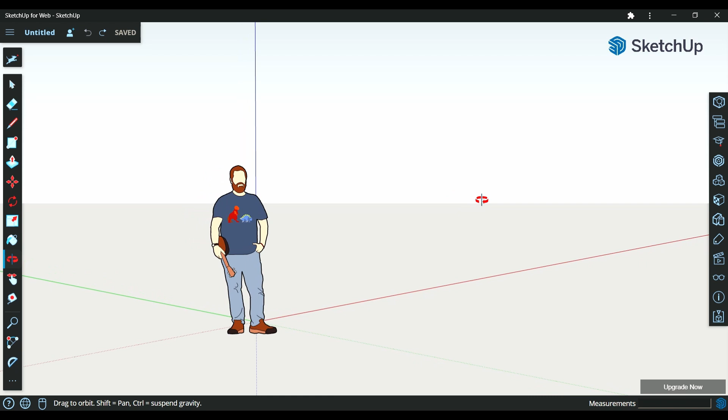This one's going to go over the approach I use to set the sizing and geometry of a bike board. We are here in the glorious expanse of cyberspace because we're not really going to be building anything. Today is just about theory. And yes, there will be a test after the video.

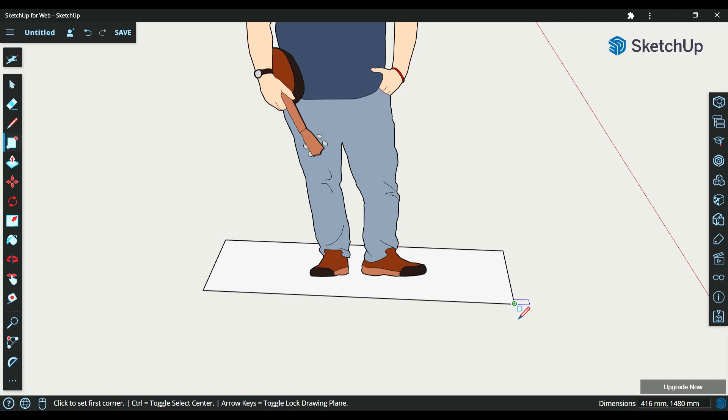So, first things first, we need to accommodate the rider. I'm drawing the size of the deck based on how wide this guy's feet are and what kind of a stance he wants to hold while riding. The next major component is the wheels. As you can see, the size of the wheel determines how short you're going to be able to make the wheelbase before the wheel collides with the deck.

Oh my god, this is just like the Mona Lisa.

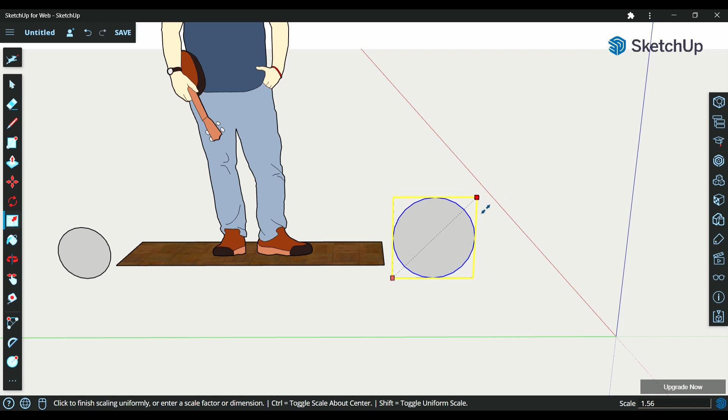So if we keep the ride height and the clearance between the wheel and the deck the same, you can see there's a trade-off between the size of the bumps you're able to handle versus the standing platform and the wheelbase. In comparison, the size of the tire plays a much more important role, which you can see when viewing the vehicle head-on.

This angle I'm drawing right now represents the maximum lean angle the board can hold before the deck hits the ground, with a steeper line meaning a steeper lean angle. And as you can see, if we keep the ride height the same, a smaller tire will permit a smaller amount of lean angle than a wider tire will. In this case, the difference is about 5 degrees.

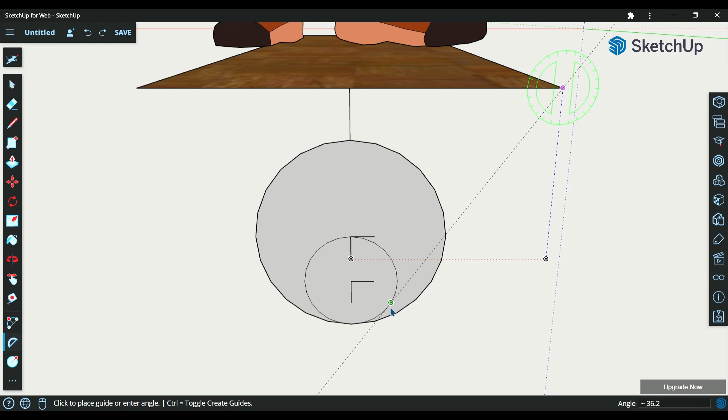The size of the tire also affects how much you're able to steer the board before your ankles give out. Imagine you're trying to make a tight turn at low speed, so your body isn't leaning very much, but the board is. According to your ankles, you're not going to feel the board rotating around the contact patch on the ground, but around the center of the tires.

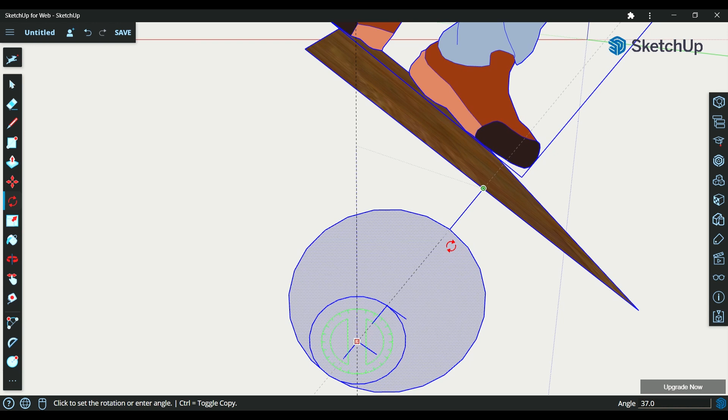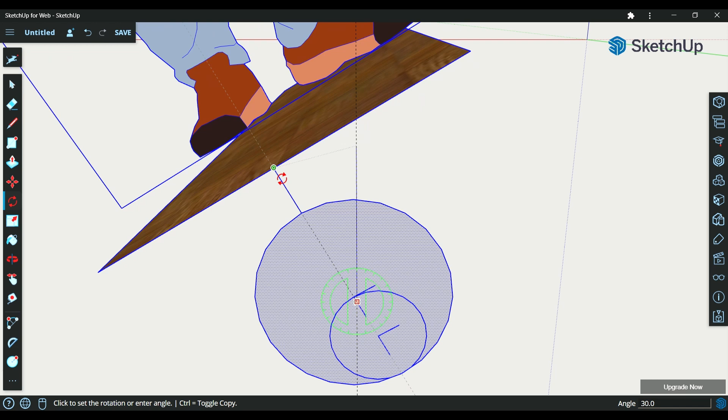If you lean the board over so that either the ball of your foot or your heel goes past this vertical line, which represents your center of mass in this situation, you won't be able to support the board anymore, and it'll just tip all the way over. A larger diameter tire will let you lean over further before your heel or your toes go past the tipping point. In this case, about 5 more degrees.

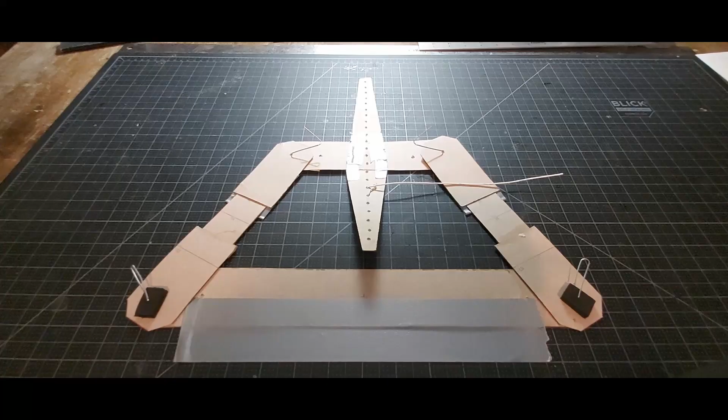So, adjusting the ride height controls the trade-off between tip-over angle and lean angle, but a larger diameter tire lets you get more of both. But enough computer programs, let's do things the civilized way and use cardboard. Now, bike boards will work just fine using a conventional bicycle steerer tube and fork, but it looks kind of dorky and tried and true methods are for suckers anyway, so let's talk about 4-bar linkages.

The steering mechanism has one link running parallel to the axle, which I'm labeling A. It's got 2 following links, which I'm labeling B. And it's got a ground link, which I'm labeling C. In linkage lingo, the ground link is the one that you consider to be stationary, and you measure the rotation of the other links relative to. For our purposes, it's the deck.

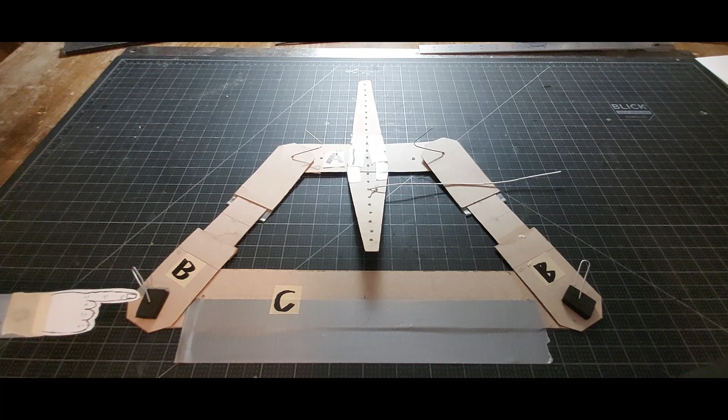Also, it's worth noting that each of these links can do all sorts of wavy, wibbly-wobbly stuff between the pivot points. For kinematic purposes, all we care about is the distance between the pivot points. Unlike a conventional steering mechanism, a 4-bar linkage does not have a single axis of rotation. The point that it rotates around at any given instant depends on the intersection point between the 2 following linkages. So, this mechanism could be rotating around this point right here, or anything in between.

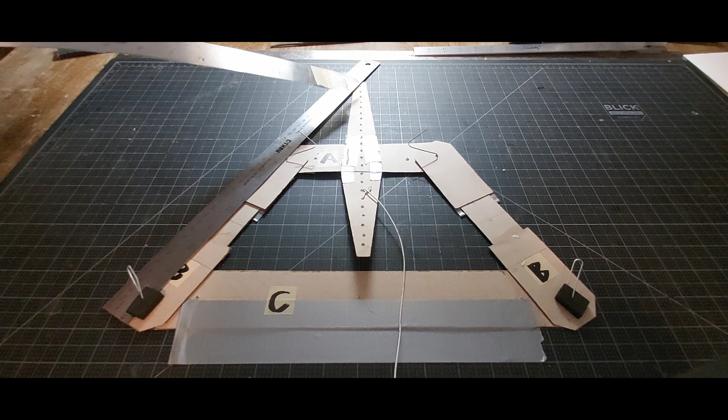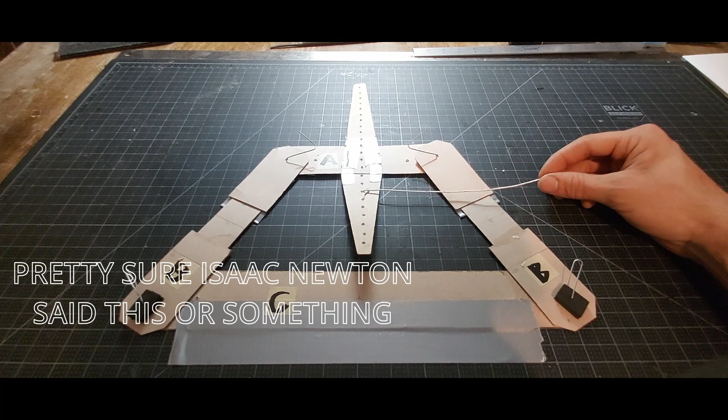That gives us the information to determine how much trail the mechanism has, which I'm defining to be the distance between the instant center at 0 steering angle and the contact patch of the wheel, represented by this string. A rolling tire that's not being acted on by a drive system or brakes will always produce forces parallel to the axle, which is represented by the fact here that I'm always pulling on this string parallel to the A link.

Unlike a conventional steering system, a 4-bar mechanism will eventually reach a point where this line of action passes through the instant center, and the mechanism will stop steering. Obviously, we're interested in maximizing the angle that we're able to steer, but how do we do that?

Trail is easy to figure out. Here you can see that I've set it up to have less trail, and clearly the lockout angle is smaller now. But figuring out what these other 3 parameters do is a little more tricky, so I'm going to have a computer solve the problem for me instead.

In order to organize the data in the computer a little more clearly, I'm going to be describing the dimensions of these mechanisms using a length and a width ratio, where the width ratio is c divided by a, and the length ratio is the forward distance from the ground link to the axle link, again divided by a. In order to do that, I've loaded up the program Octave, which is like open source MATLAB.

In broad strokes, what it's doing is to calculate the position of the instant center and the force vector coming from the contact patch, and then using the secant method to zero in on the steering angle that makes that torque go down to 0. Then, once it's found the steering angle, repeat that for a whole bunch of different width ratios, and then length ratios, and then draw a pretty graph of the results.

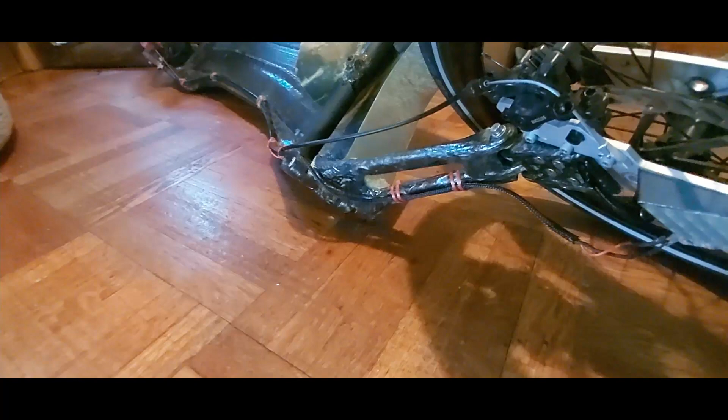But there is a catch. More trail will give you more leverage to steer the front wheel, but when the board is leaned over, steering the front wheel will move the deck away from and towards the ground.

And of course this effect will be larger the more trail you have. So a board with a lot of trail is going to need some extra ride height at the front of the deck in order to maintain the desired amount of lean clearance in turns.

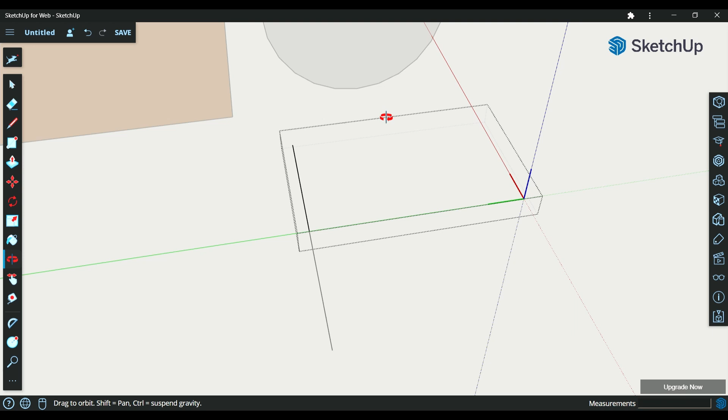Now let's go back to SketchUp to draw the geometry of the mechanism and see how it fits into the board. I'll start off by making the total width the same as that of the deck, taking a random guess for the length, connecting those to form the following links. Now let's just take a random guess and say that I want to have the axle link be 150 millimeters. I'll just drop that into place right there.

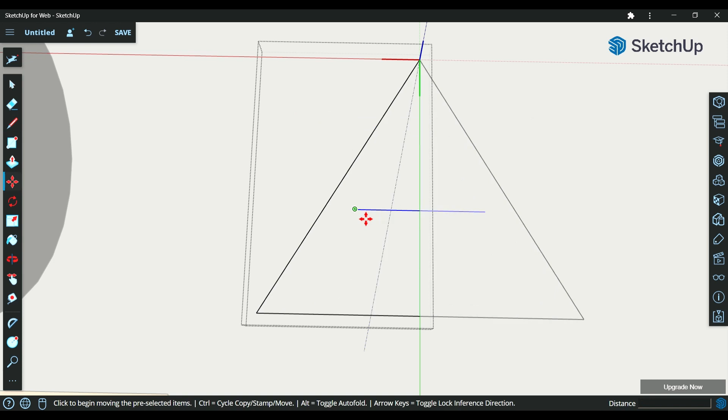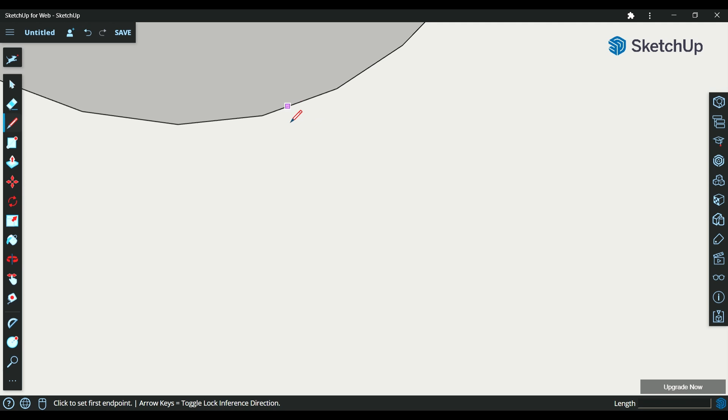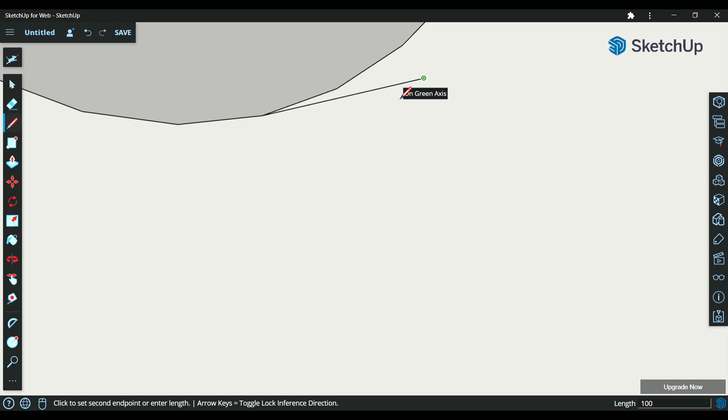As I've mentioned before, the trail point is where the two following links converge, so I've dropped a perpendicular line there just for reference. Now let's say I want 100 millimeters of trail. I'll extend that line out from the bottom point of the wheel. Now I can take my mechanism and just drag it over there.

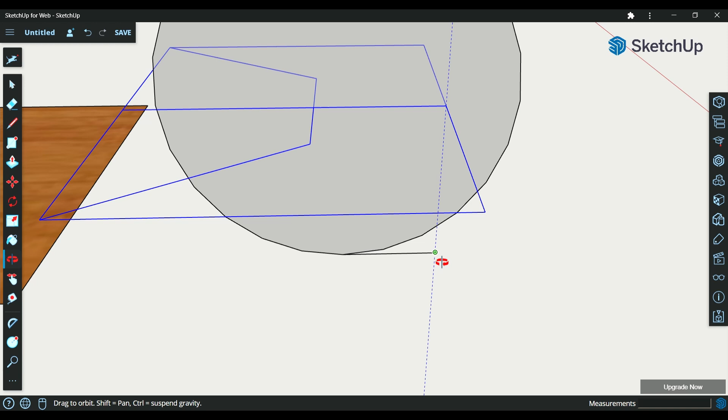And as long as this perpendicular reference line passes through that point 100 millimeters in front of the contact patch, the mechanism will have 100 millimeters of trail. So every rotation or transformation I do to the mechanism over here has to be with respect to this point. For example, say that I want to have 15 degrees of rake, I can grab the mechanism around this point and tilt it over by that amount.

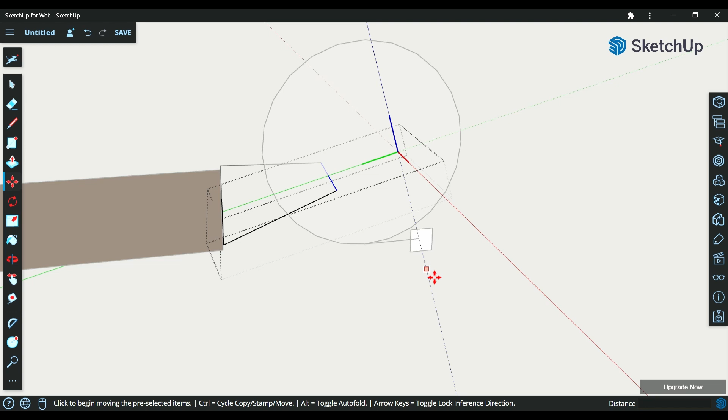You can take any of the pivot points and translate them up and down along the steering axis like this, and it won't actually change the behavior of the mechanism. The only thing that matters is how the mechanism appears from this perspective, normal to the plane of the linkage. And changing those positions doesn't really do that.

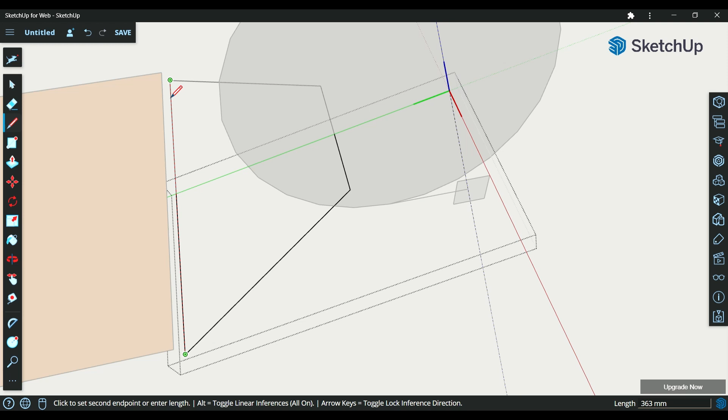So now I'll just double check what I've got here. I've got 96 millimeters of trail measured normal to the steering axis, 150 millimeter axle link, 363 millimeter ground link, and a length of 176. That works out to a trail ratio of 0.65, a width ratio of 2.4, and a length ratio of 1.2. So if we look that up on the chart, it comes out right here.

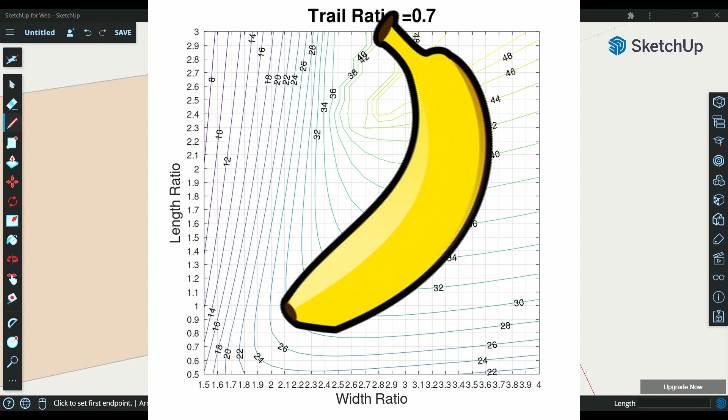We can see that we're going to get about 31 degrees of steering, which is serviceable, I guess, but it's not too great. Since I started off the drawing with something that was pretty close to an equilateral triangle, the mechanism is in that sweet spot where changing the length or the width by itself won't do much. I have to decrease the length of the axle link. So I'm going to do that by redrawing that line, and I'll draw the axle link to be 100 millimeters instead of 150.

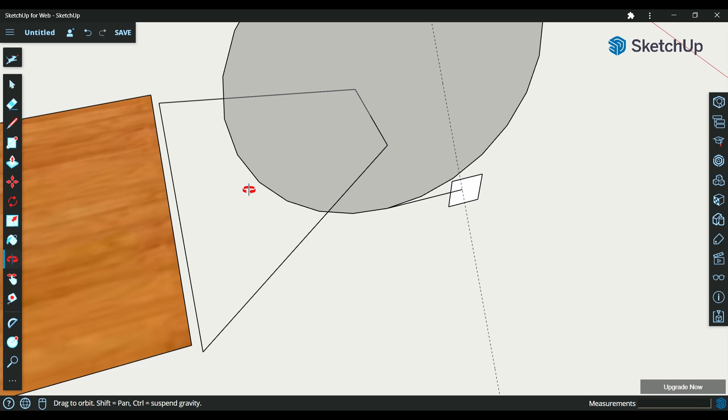This version of the mechanism has a trail ratio of 1, a width ratio of 3.6, and a length ratio of 1.8. Going back to the chart, that puts us right here at about 40 degrees of steering.

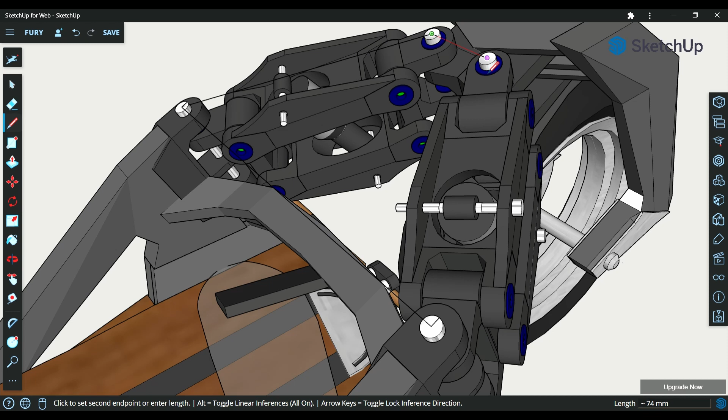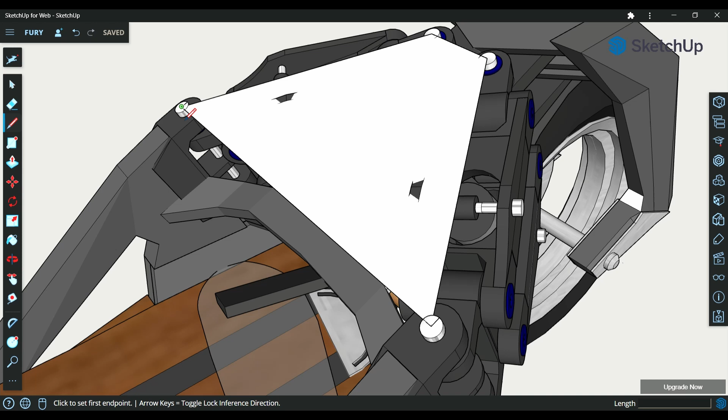Here's the model of my own project to show you how I approached the problem. It looks a lot more visually cluttered, but don't worry, the familiar 4 bars are just hiding right here. I made the axle link as short as I could, that's about 74. We've got a width of 381 and a length of 222, all with a trail of 100, which comes out to a trail ratio of 1.4, a width ratio of 5.1, and a length ratio of 3.

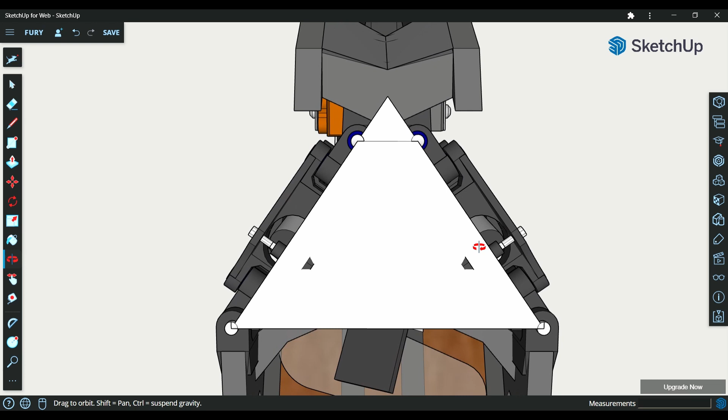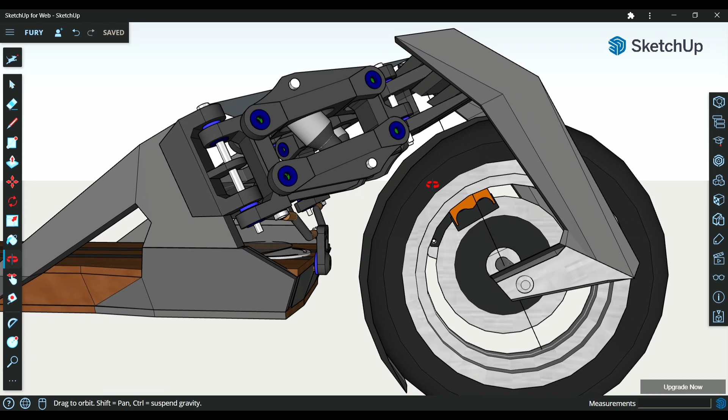And that's it for now. The next installments will be about fabrication techniques to build this thing.